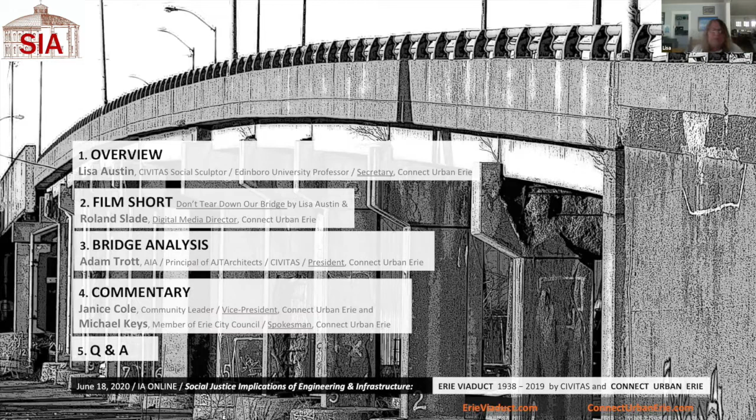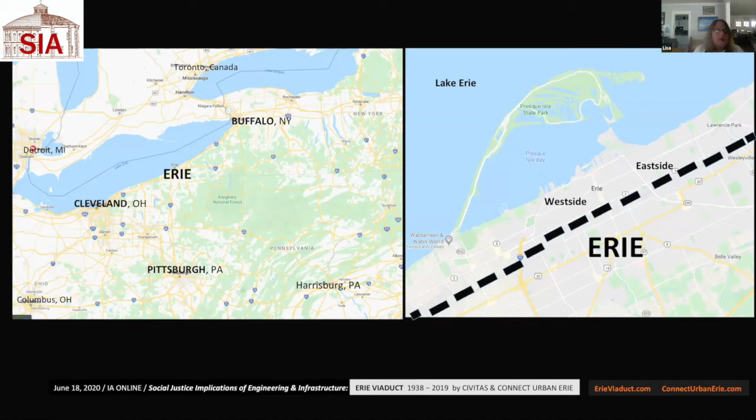Erie is located in the northwest corner of Pennsylvania. A lot of people don't realize it's very close to Cleveland, Buffalo, and Pittsburgh. If you look on the right side of the screen, you'll see the city of Erie, and the dotted dashes represent the rail line, the very busy rail line that runs through the city, dividing it north and south.

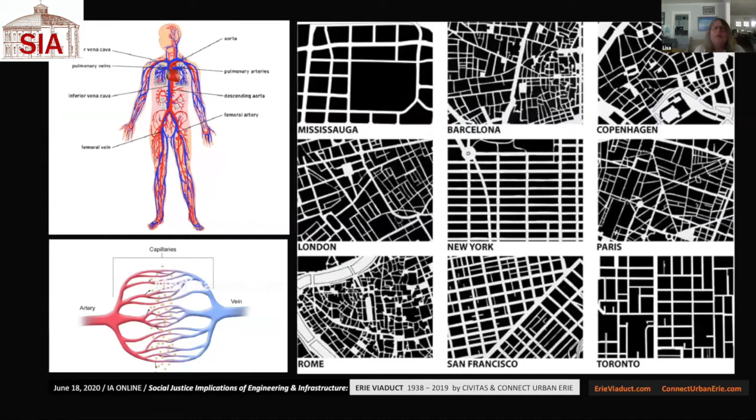One of the concepts we've really been focusing on is the idea that the necessity for connectivity within the human body is very similar to the necessity for connectivity in thriving cities. You need many ways to get from point A to point B.

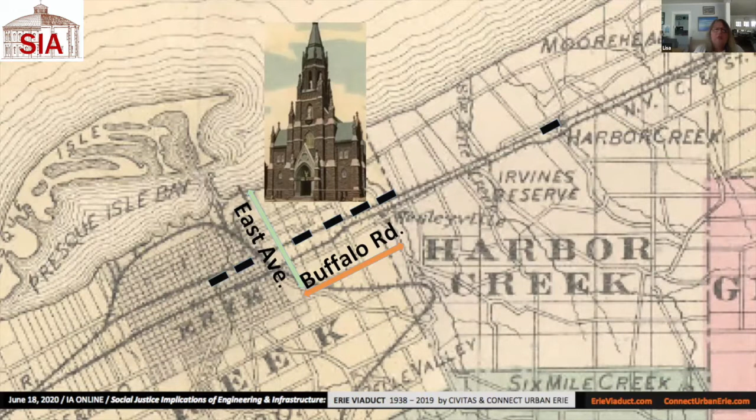In Erie, the Irish actually settled on the east side of town, not too far from the railroad tracks, actually on both sides, but mainly on the north. They established a church, St. Anne's, right on East Avenue, just 2 blocks from the railroad line.

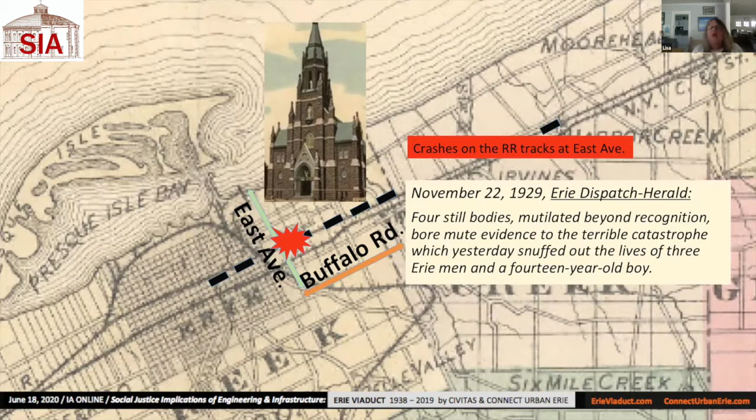Unfortunately, as people walked or drove along East Avenue to the at-grade crossing over the railroad tracks, there were a number of crashes and deaths, and this led to a call for a bridge. After 20 years of effort, Monsignor McBride, pastor of St. Anne's Church, worked with other Irish leaders to actually get the bridge, the viaduct, created, built, and dedicated.

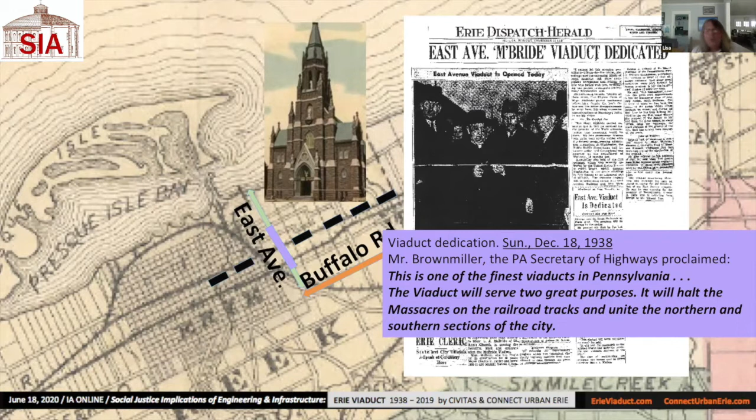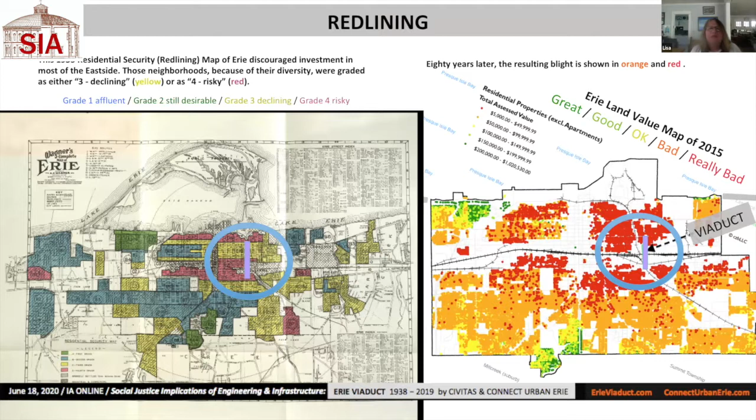It also led to disinvestment in the bridge itself. There was very little maintenance done on it after the 70s. We'll hear more about that later on.

When the bridge fell into this disrepair, it was deemed no longer fit for vehicular traffic, tractor trailers and so on, so it became a completely pedestrian bridge for about 8 years. This was an unintended consequence of closing it to vehicular traffic — it became a destination for the east side, connecting the neighborhoods north and south of the tracks.

About 15 years ago, a highway was built immediately to the west of the bridge, and they also had a highway bridge. This reinforced the sense among the city that the viaduct wasn't really necessary.

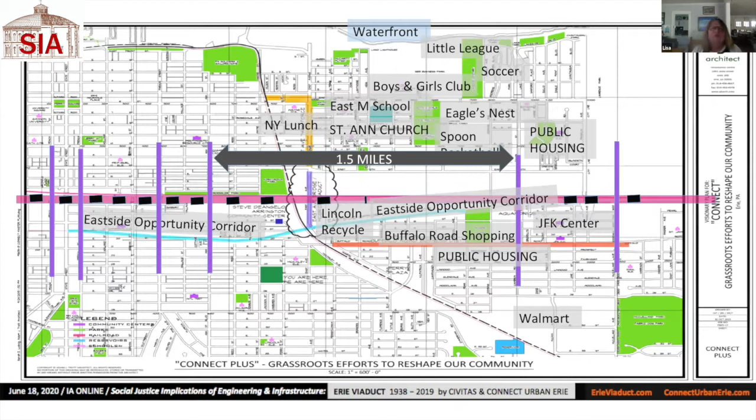I want to also point out these are just some of the East Side destinations sought after by people walking and biking over the bridge, and that if you don't want to walk along the highway, you have quite a trek to the east or west to get to another connection point.

These neighborhoods surrounding the viaduct are some of the very poorest in the country, some of the most diverse, with very limited public transportation, and many of the people do not have a car in their family. They must walk long distances to buy food, go to work, whatever.

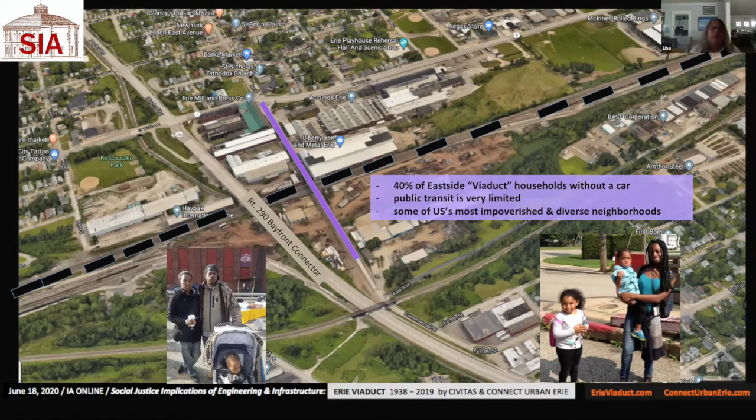Erie was named in 2017 as the country's worst city for African Americans, and you can see that this was part of a pattern of sort of neglect of this part of the city.

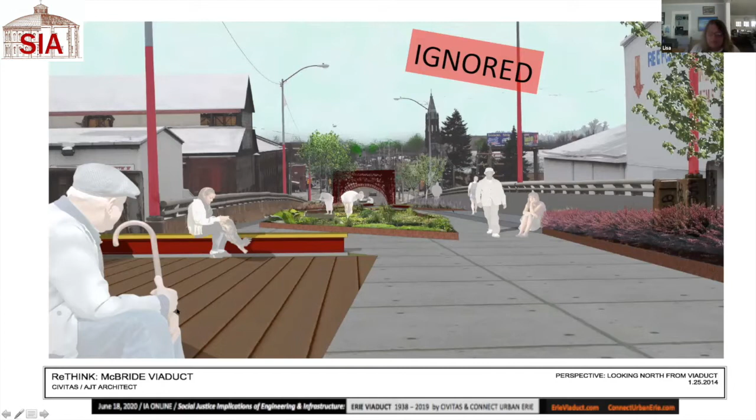I'll show you a number of slides here of the people that have been sort of ignored. And then one of the things that was happening was we actually had landscape architects and architects work up alternative plans of what could happen with the viaduct.

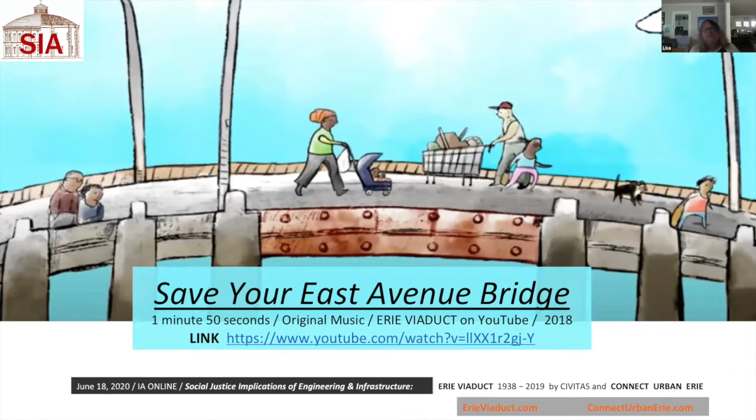We had animators and songwriters making artworks to celebrate the bridge. Some of the African-American leaders came out and spoke for the need to save the bridge. The NAACP was also involved. We actually went to Harrisburg to try to lobby our elected leaders.

We brought in half a dozen experts to talk about this issue. We tried to hold, and did hold, a town hall because there was no public hearing on this issue. Michael Keyes, one of the people who will be speaking today, was part of that town hall.

We had a number of local businesses that came out and talked about why it was important to save the bridge. We actually had the lead consultant suggest that we really do need to have a hearing about it. He thought there was great potential in adaptively reusing the bridge.

It was also framed as a social justice issue. It actually landed on the front page of the New York Times. And this is my last slide before I show you a quick video.

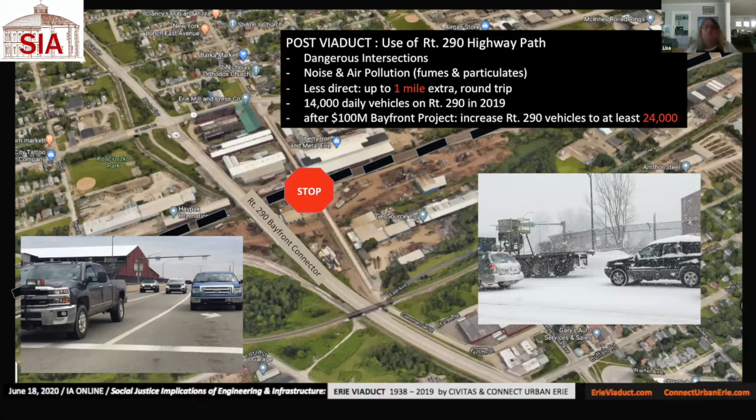Currently, this is a route to school as well. Children are breathing fumes from 14,000 vehicles. And after the proposed $100 million expansion of the Bayfront roadway, they're going to also be increasing the traffic along this area, so the kids will be breathing another 10,000 vehicles' fumes a day.

So I'm going to the next slide here, and I've got a very short video for you to watch so you can hear directly from some of the people on the bridge.

We should save this bridge. Save the East Ave Bridge. Keep it, I don't think they should knock it down. I wouldn't want anyone to destroy it. Save the East Side Bridge. I'm trying to save the bridge. I think we should save the bridge. We need this bridge. Everybody wants this bridge, everybody uses this bridge. Y'all need to keep it open. I just think we should keep the bridge here. We're out here trying to save this bridge. We love this bridge, we don't want you to tear it down. We need to bring this bridge back. I don't believe it should be torn down. So please keep the bridge open.

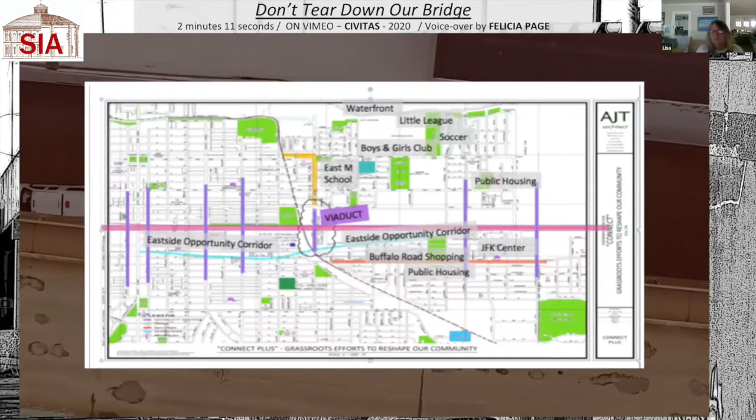The McBride Viaduct was a bridge over the railroad tracks. The viaduct connected East Side Erie. The neighborhoods around the viaduct are some of the most diverse and impoverished in the United States.

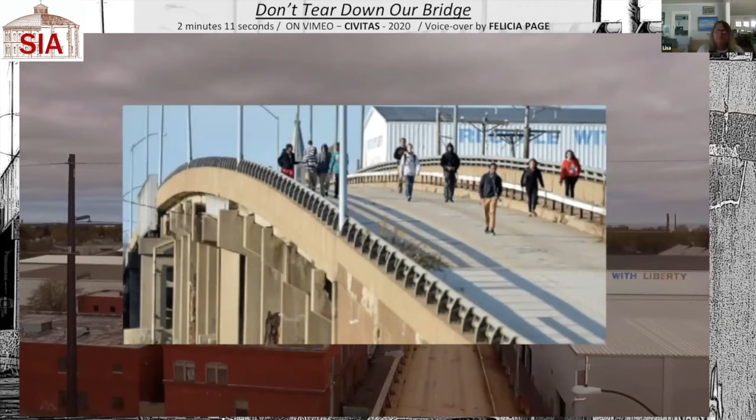After decades of neglecting the viaduct, and after the construction of a nearby highway, engineers closed the viaduct to vehicular traffic. But removing traffic transformed the viaduct into a pedestrian and bike artery.

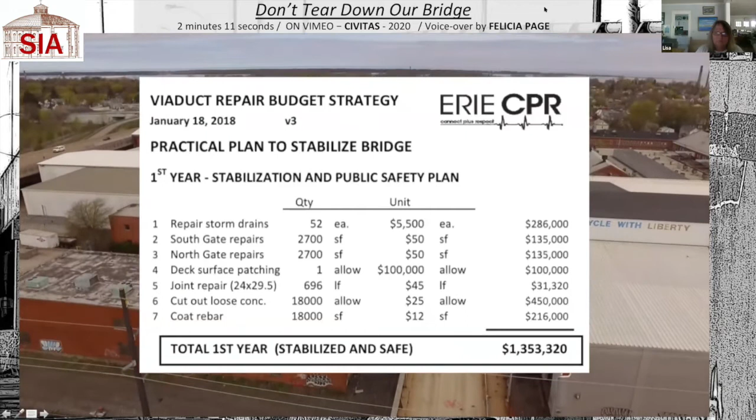Despite a front-page New York Times story, advice from national experts, and pleas by local leaders, the city refused to hold a public hearing. Demolishing the viaduct cost $2.7 million, twice the price of stabilizing it for continued non-vehicular use.

Since the demolition, Eastsiders, including school children, must walk along the highway and deal with noise, fumes, and dangerous intersections with thousands of cars, trucks, and tractor-trailers.

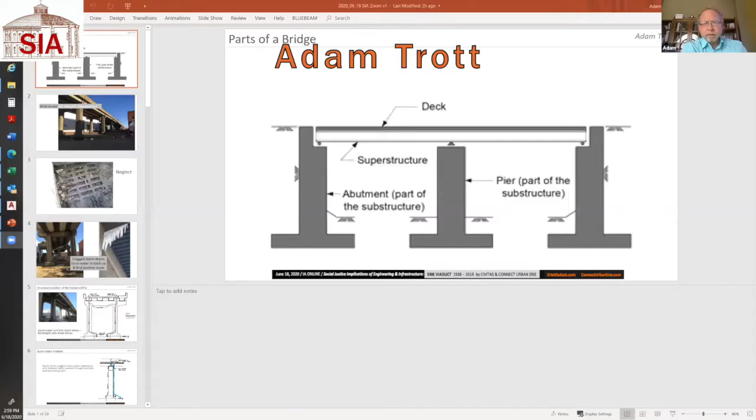I'm going to go through quickly what happened to the bridge physically. This is just clarified language, some of which was used in earlier discussions. The deck is the surface that traffic transports over top. The superstructure is the beams that carry the deck. The substructure consists of either piers between elevated decks, or abutments between the hill or grade and the elevated decks. So that's what I'll be referring to as we proceed.

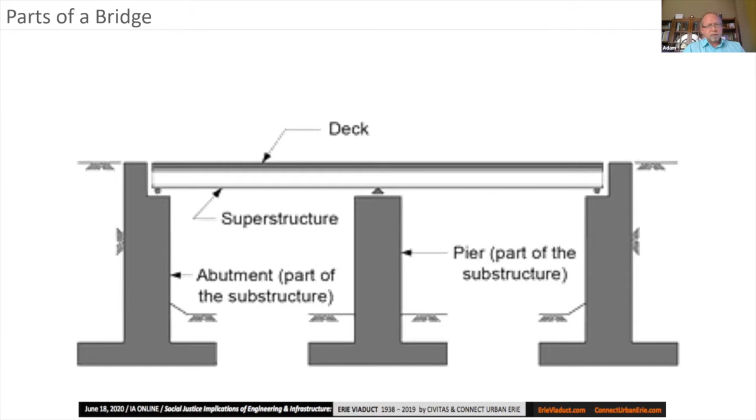So what caused the viaduct's deterioration? The viaduct is a reinforced concrete box beam bridge. It was built in 1971 to replace the original steel structure bridge built in 1937-38. And when they built it, they just ignored it. They walked away from it from then on out. Neglect is why the bridge deteriorated.

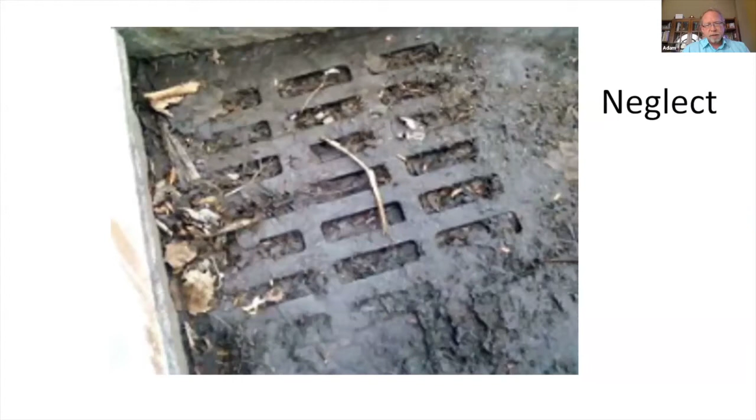The main cause is this picture. The storm drains were never cleared out, so they piled up with soot from the vehicles and trucks, and they eventually clogged. The clogging forced the water to find another way to get off the deck.

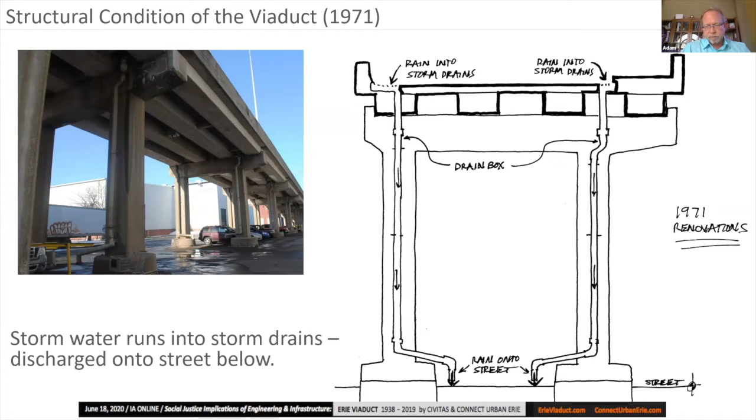This is how it was supposed to work. There's a crown in the middle of the roadway, and then storm catch basins on either gutter on the east and west sides. The storm drains are right near the seams between the deck portions, because the piers are used to take the rain conductors down and discharge the rainwater on the street level below.

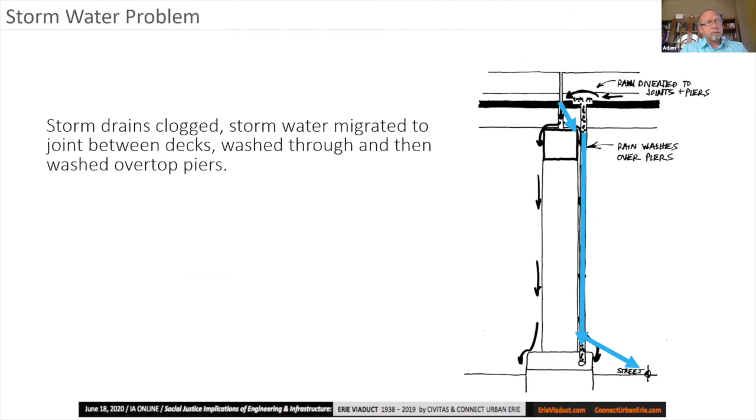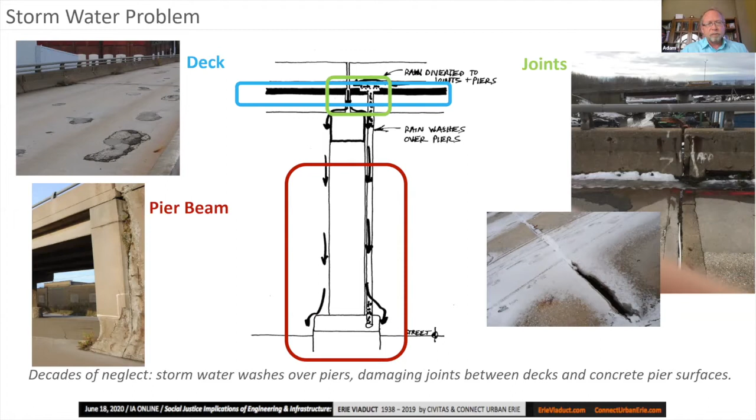So it's a pretty simplistic system. However, when they neglected the storm drains and they clogged, the water looked for somewhere else to go, and the nearest place to get off was the joint between the decks, the seams between the decks. So the water started to go down there, and the consequence is it would eat away the joint between the seams, and then continually wash over the beams that carried the decks. It started to get into the concrete skin of this reinforced concrete structure.

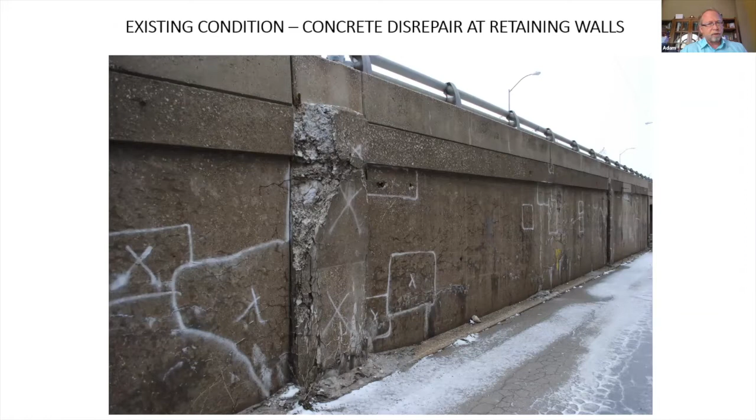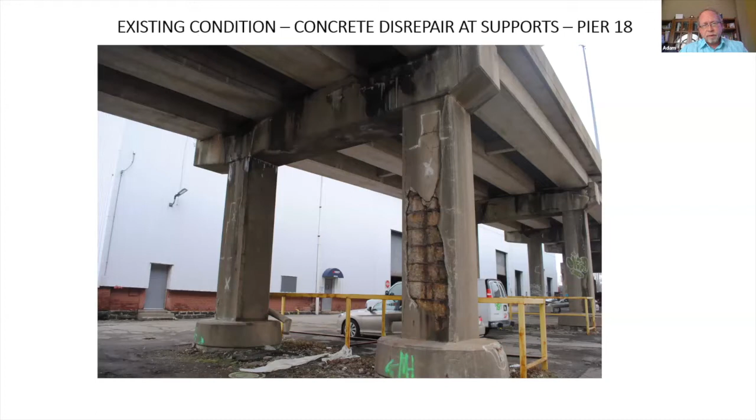However, they never thought to estimate what it would take to just restore the bridge for bike and pedestrian use. They only focused on either it's going to carry cars and trucks, or we get rid of it. And that is what bolstered the case for saying, well, we have the highway bridge right nearby, so let's just demolish this bridge, get it off the books, and use the highway bridge. The problem is the highway bridge is horrible for bikes and pedestrians, and the McBride Viaduct was a haven for that crossing traffic.

As you know, the outer edges of the pier beam are in compression and tension, so that's where all the steel rebar is put. And when the water was starting to get into the concrete, it would get between the steel and the concrete on the edge, and it would spall it. That's why you get what we got today, or back when the bridge was still here.

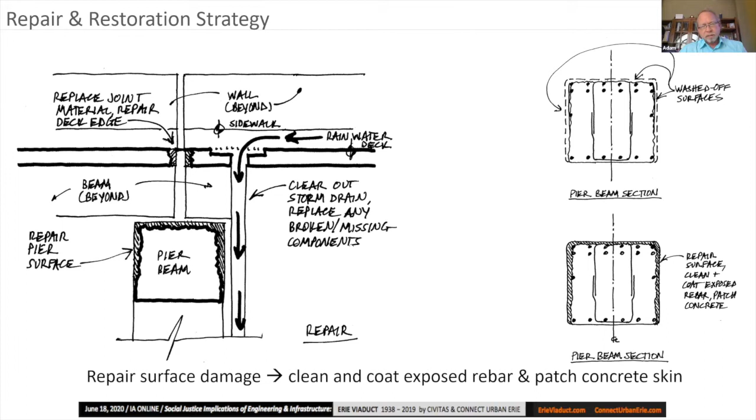So our strategy was: the first thing to do is stop deterioration. Open the storm drains, fix the joints, and coat the exposed areas of the beams and piers to stabilize it, to stop the deterioration, and then get the money to finish the repair. We felt that was not too hard of a lift, because the cost to do that was pretty similar to the eventual cost of tearing down the bridge.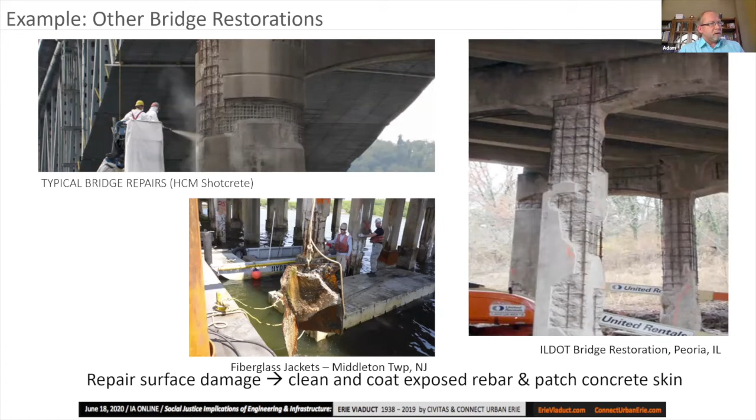And they do it all over the country. These pictures are examples of just that kind of repair. Some of these are even worse than what we had, and it's done all the time. So our strategy: fix the drains, repair and seal, and fill the potholes on the deck, and then you stabilize the structure for use.

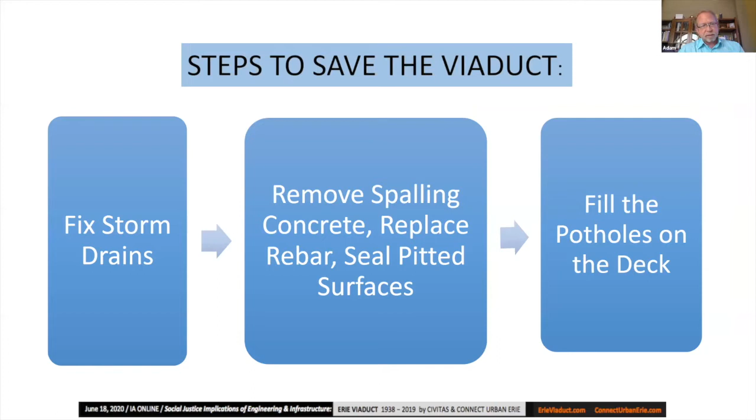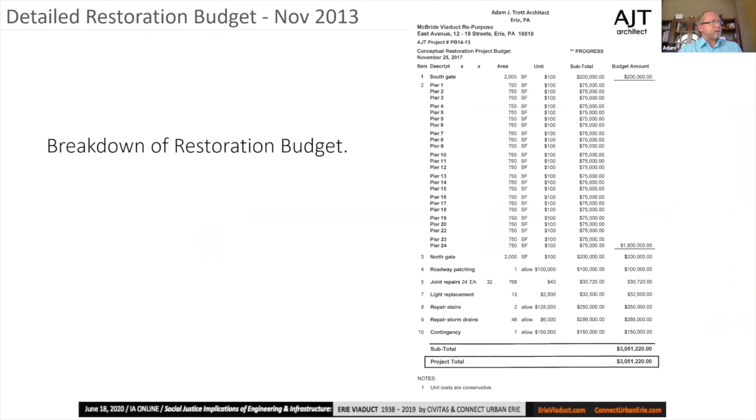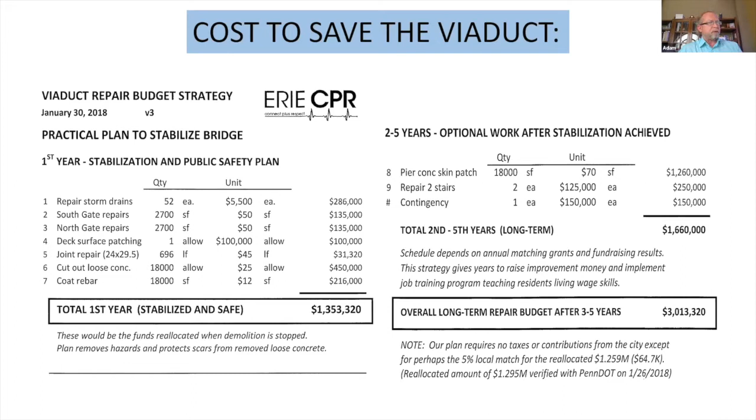This is the two-phase plan. The left side is to stabilize it for 1.35 million, and the right side is the permanent fix and skin corrections, replacing a few steel rebar pieces, for 1.6 million. So the total of our budget was a little over 3 million, and we would have 3 to 5 years to raise that money.

But we had a whole bunch of contradictions to the City Hall and PennDOT rationalization of their budget, and we proved over and over again that they were misleading the public on what it would take. That is why we pushed for a public hearing to get this all out and on the public record. Unfortunately, we were blocked.

The money for stabilization was already out there, and we just needed to divert other funds to do the long-term restoration. So these were suggested ways to raise the rest of the money.

It's important to note that when we were doing this effort, the Infra Grant program was what was active at the time. Today, as we're meeting here, the Invest Act is a similar program to help repair infrastructure, and that's being debated right now in Congress. There's a lot of details to that.

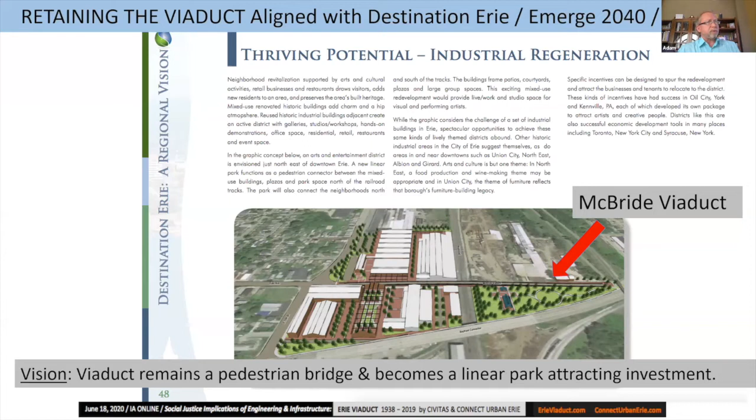Unfortunately, there was long-term planning for the region that actually expected the McBride Viaduct would remain and contribute to being a catalyst for an industrial resurgence area right where the viaduct is. They just ignored that also, because a few people at City Hall just had it in their head, we're going to tear this bridge down no matter what.

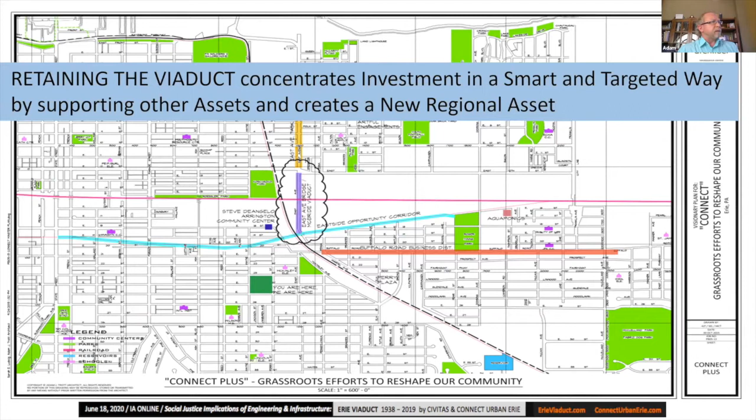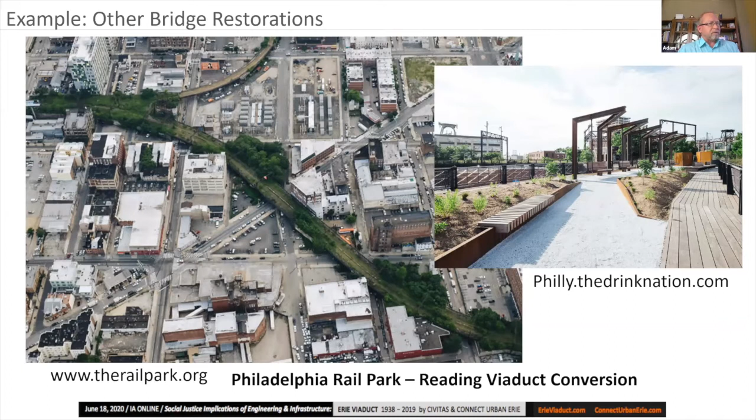These viaduct projects, this is the Philadelphia Rail Park, which is a repurposing of the Reading Viaduct, kind of Philadelphia's version of the High Line in New York City. These projects are moving forward, getting all the funding they need, and they're successful. We just wanted to do the same thing in Erie.

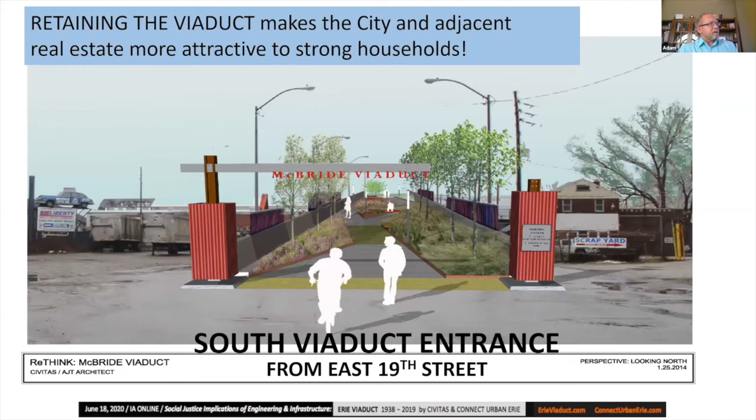We had all kinds of visions on what we could do with it. This was a bike pedestrian area of refuge designed for the north end that would connect the bridge to East Avenue. All these efforts were ignored because there were a few people that just wanted it down, and they had the authority to just muscle it through.

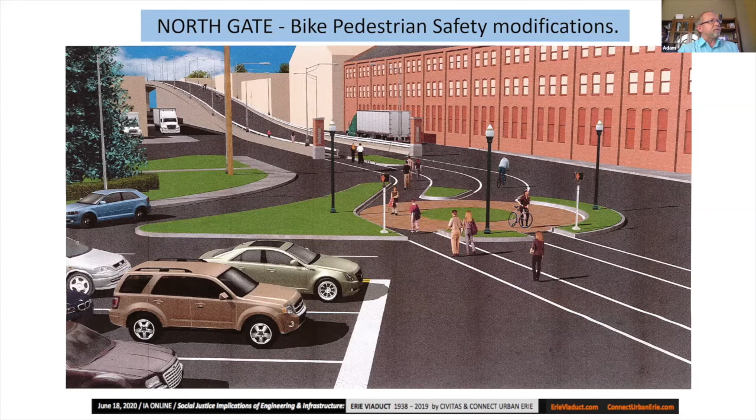This view is looking north. When you're on the bridge and you're looking north at East Avenue, the tower on the right is St. Anne's Church that Lisa referenced earlier.

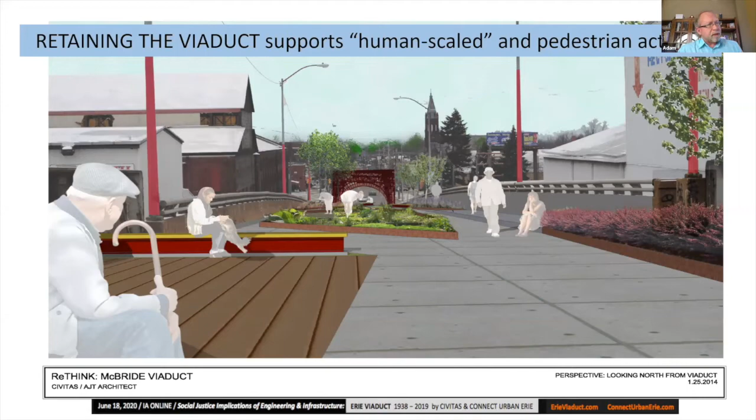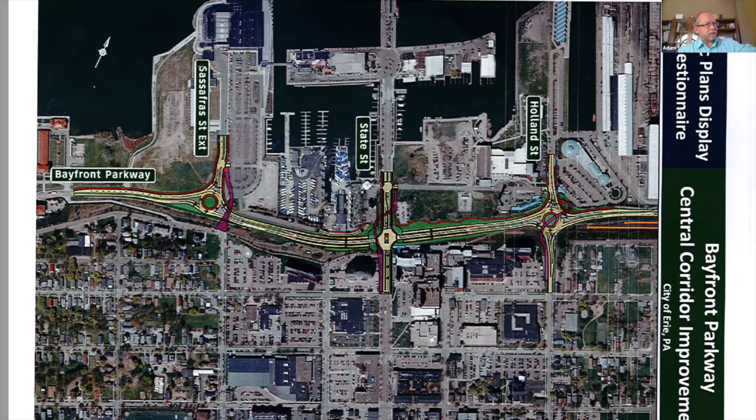And finally, what's happening that's even worse, they're looking to pump up the central Bayfront corridor area to serve future development on our precious Bayfront. That's going to double the car traffic vehicle count from currently 16,000 cars up to 29,000 or more. Unfortunately, that means when that gets bumped up, all that induced traffic load is going to show up on the east side where we are now missing our bridge. So what is currently a 14,000 or more count per day of vehicles is going to jump up to 25 to 29,000. So the trek for these people is going to be even worse than it used to be.

Janice Cole, our Vice President, is next.

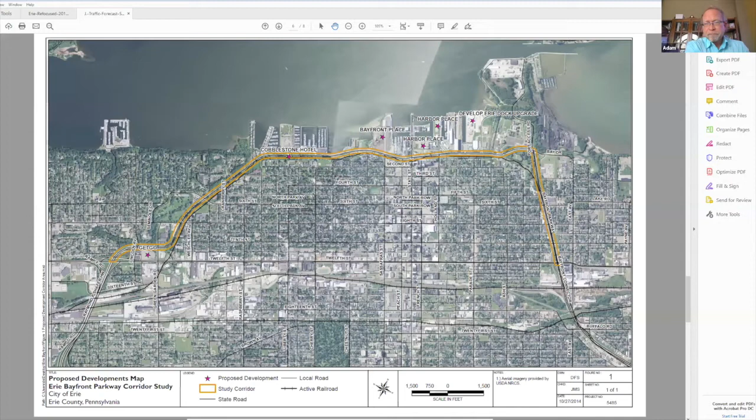After they took the traffic off the bridge, I enjoyed seeing the new Americans, the children going to school, not just high school children, grade school children. This was a way they could freely walk, push their strollers, ride their bikes, and those who were less fortunate pushed their shopping carts. It was just a nice bridge for people to cross, and it gave you a warm feeling, a beautiful structure. As you look away from the highway and come up going east toward 12th Street, the structure of the bridge was just magnificent.